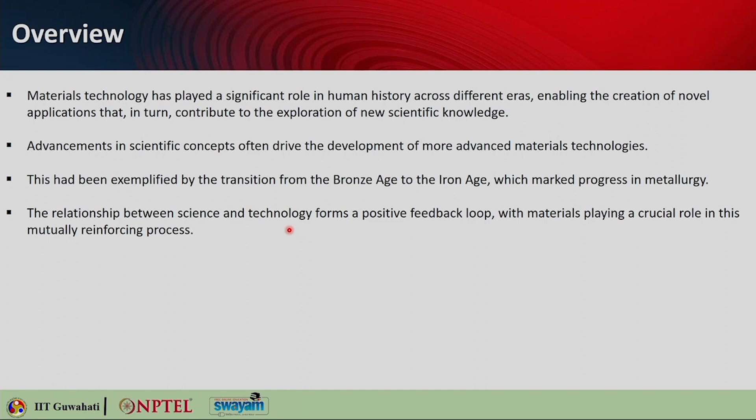Advancement in scientific concepts often drives the development of more advanced material technologies. This has been exemplified by the transition from Bronze Age to Iron Age, marking progress in metallurgy. The relationship between science and technology forms a positive feedback loop, with materials playing a critical role in this mutually reinforcing process.

Two significant examples from the past century are semiconductor technologies and optical communication, both of which have had a transformative impact on our ability to handle information. It is the blessings from semiconductor technology that allow us to compute very fast, and optical communication that allows transfer of data at lightning speed. These two have actually impacted a lot.

In recent decades, processing speeds for handling information have experienced exponential growth, primarily driven by the scaling of semiconductor electronic components. This trend was predicted by Moore's law - that the number of transistors in a chip will double every 1.5 to 2 years. This advancement in semiconductor technology and optical communication has revolutionized how we process and transfer information in this modern digital age.

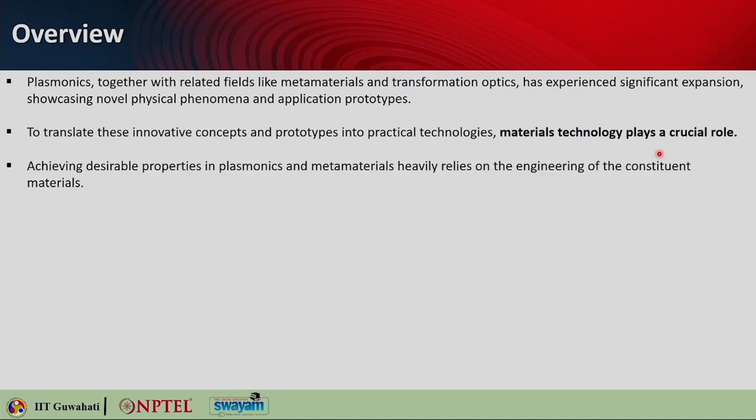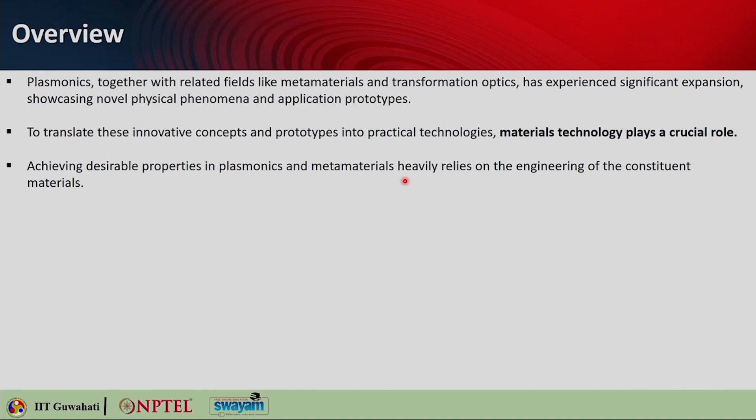Now, to translate these innovative concepts and prototypes into practical technologies, this is where material technology plays a crucial role. To achieve desired properties in plasmonics and metamaterials, they actually rely heavily on the engineering of the constituent materials. So that brings in the importance of material science in these domains.

Now, plasmonics has gained significant recent attention, though the first demonstrations of plasmonic effects were age old. If you remember the Lycurgus Cup or the stained glasses seen in medieval cathedrals - those were the first instances where plasmonic effect could be seen.

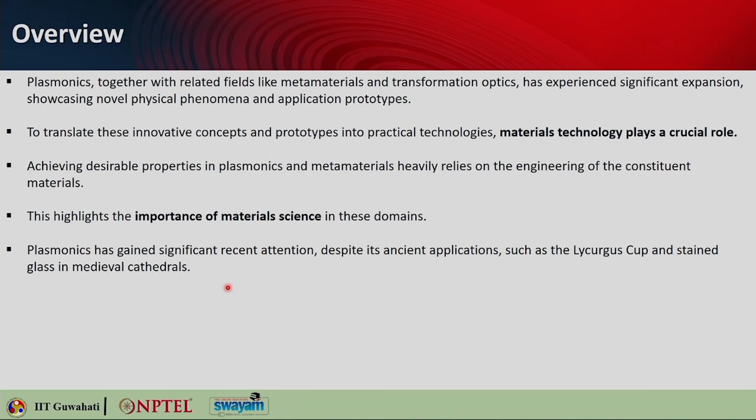Still, people are exploring plasmonics in this new digital era, because that can actually help in overcoming the limitations of both semiconductor electronics as well as dielectric photonics, and can give you the best of both worlds.

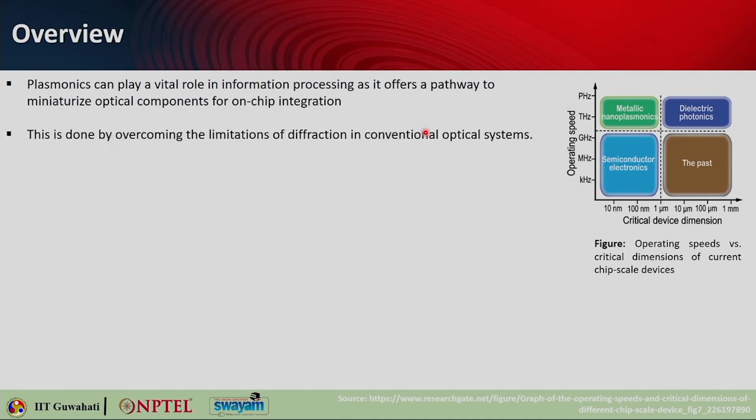You can get the critical dimension of the device almost below 10 nanometers, and you can still target operating speed above 1 terahertz. This can be done by breaking the limitation of diffraction of the conventional optical system. That is the challenge dielectric photonics faces.

Optical communication, being the fastest means of information processing, has this problem of miniaturization, and this is where plasmonics can help. Plasmonics can get you the size below the diffraction limit. We have seen this already.

This is an example of how you can excite surface plasmon polariton propagating along a metal dielectric interface when light is falling. But one thing not shown here is that it cannot be directly excited by simply shining light on the interface. You have to have an arrangement of phase matching, either using a prism or a grating.

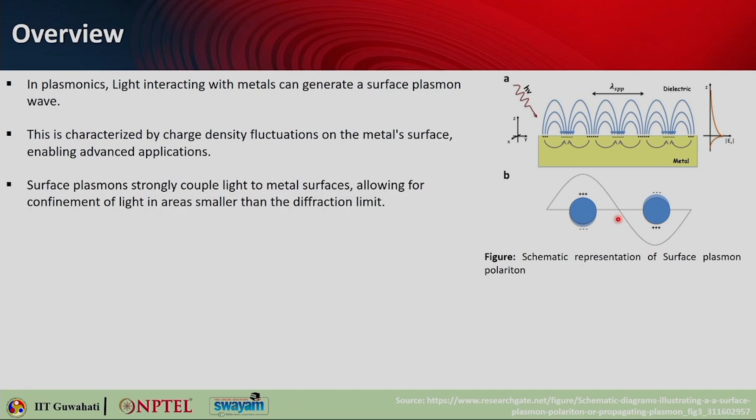We have seen this, and this is the example of localized surface plasmons which can work without anything—you can simply shine light on it and excite localized surface plasmons. They allow amplification of local electromagnetic field intensity by several orders, and they have found applications in sensing, scattering, absorption, enhanced absorption, or enhanced scattering phenomena.

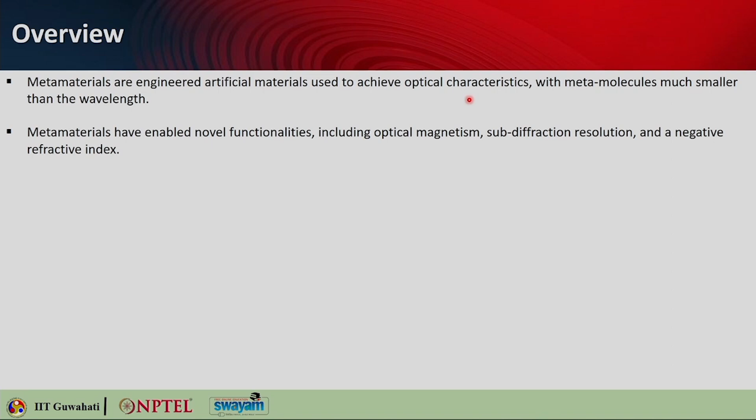We have also seen that metamaterials are basically engineered artificial materials that can give new optical properties, and the meta-atoms or meta-molecules are designed to be much sub-wavelength, smaller than the wavelength of light. Metamaterials have enabled novel functionalities such as optical magnetism, sub-diffraction resolution, or negative refractive index, and all these are possible by the materials themselves.

If you take metals, they exhibit negative real permittivity at optical frequencies, whereas dielectrics have positive permittivity at optical frequencies. Metals introduce optical loss due to their electronic transitions, creating a problem at optical frequencies because that limits device performance. If there is loss, the device heats up and you lose energy since it is simply getting absorbed. This presents a challenge in the design and integration of plasmonic and metamaterial devices.

If you use conventional metals, you face issues because of this high loss at optical frequencies. Now let us discuss these limitations of conventional plasmonic materials in more detail.

When you think about plasmonic materials, gold and silver should come to mind immediately. They are the popular choice for plasmonic and optical metamaterial devices due to their low ohmic loss and high DC conductivity. However, at optical frequencies, these metals exhibit interband transitions which introduce significant losses.

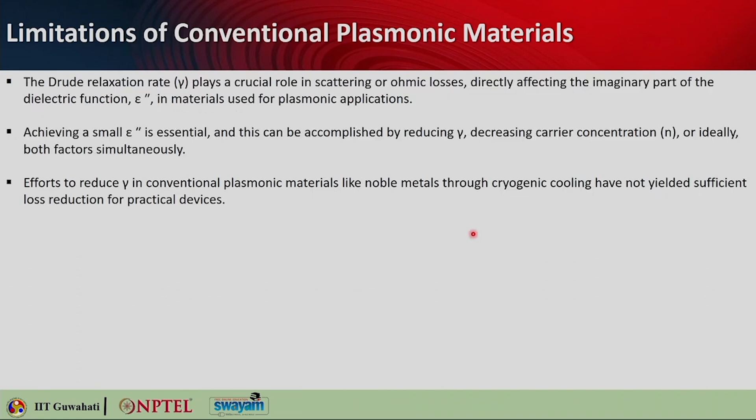Now, the efforts to reduce gamma, the relaxation rate, in conventional plasmonic materials like the noble metals, gold or silver, can be achieved through cryogenic cooling, but that has not yielded a sufficient amount of loss reduction for practical devices. So that did not work out.

So once again, what is the method of making this imaginary part small? You can reduce gamma or decrease the carrier concentration. These are the two methods: either you decrease this, or both simultaneously.

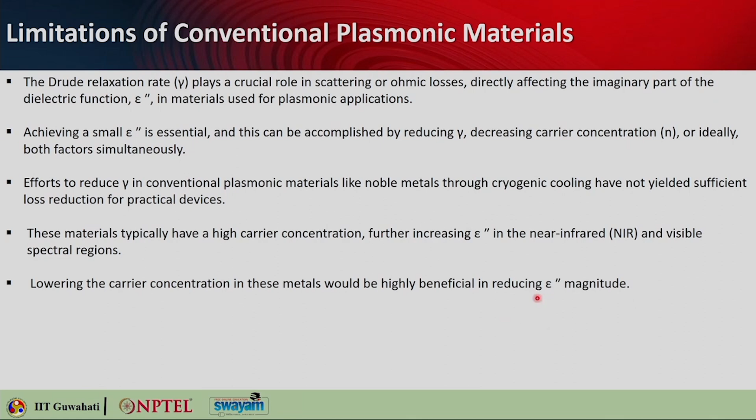Here what has been seen is that for noble metals or materials, they have very high carrier concentration, and this further increases epsilon double prime in the NIR and visible range. So lowering the concentration in this metal would be very beneficial for reducing the epsilon double prime magnitude. So what we are planning is to actually reduce the carrier concentration in the metal, which should give you a lower imaginary part of the permittivity.

Now, because conventional plasmonic materials like gold and silver suffer from high loss, they have significant issues in applications in plasmonics, optical metamaterials and transformation optics. It's understood, because if you design a waveguide using this kind of plasmonic material, because of the loss, the propagation length will be very short, so that will not help you.

Although you are able to confine energy in a very tiny space, you will not be able to take that energy further because of this kind of intrinsic material loss. And another challenge will arise from the real part having a large magnitude in transformation optic devices. So in transformation optic devices, for metal dielectric combinations, you should not have very large singular values.

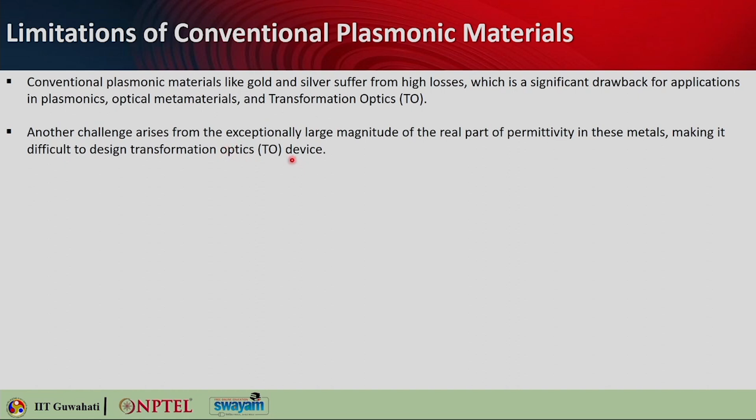If you make epsilon double prime very small, another challenge comes from the exceptionally large magnitude of the real part of the permittivity. In materials like gold and silver, the real part of permittivity is very high, which makes it difficult to realize a transformation optics device.

On the other hand, if the metal's real part is significantly larger than that of the dielectric, it requires using very small metal inclusions within the metamaterials, or metamolecules in a metamaterial design, and such small metal inclusions make it very difficult for nanofabrication, creating fabrication challenges.

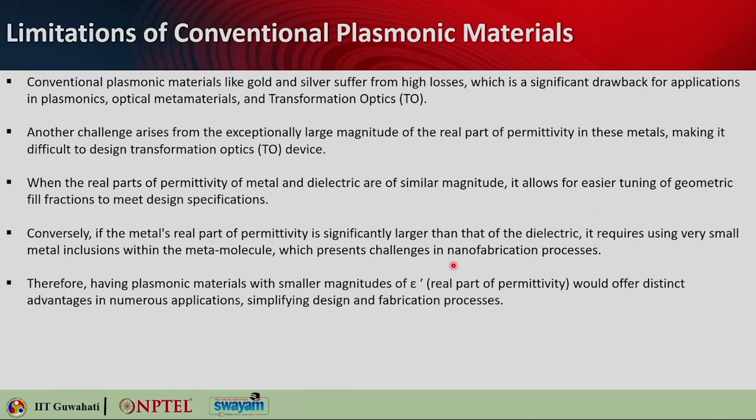Therefore, having plasmonic materials with smaller magnitude of epsilon prime, the real part of permittivity, would offer distinct advantages in numerous applications while simplifying the design of the structure and simplifying the fabrication processes.

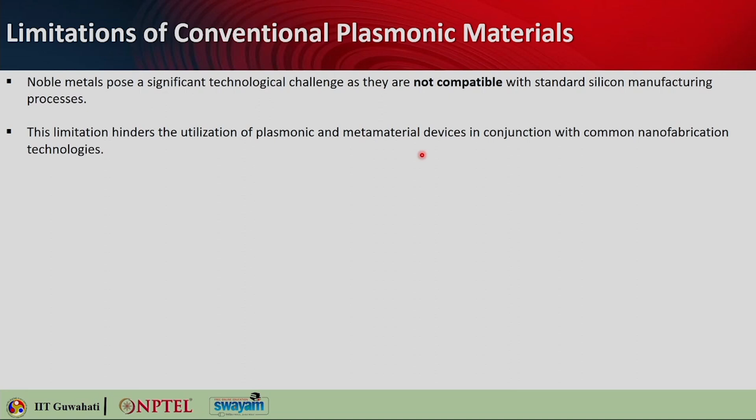So we understood that noble metals pose a significant technical challenge and are not compatible with standard silicon manufacturing processes. These limitations hinder the utilization of plasmonic and metamaterial devices with common nanofabrication technologies. Also, the incompatibility limits potential integration of plasmonic and metamaterial components with nanoelectronic devices, restricting the development of advanced hybrid technologies.

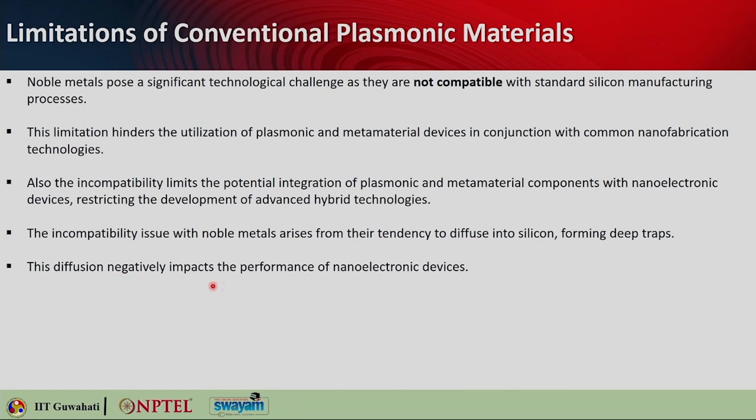So the issue is with the material that shows these plasmonic properties. The incompatibility issue with noble metals arises from their tendency to diffuse into silicon, forming deep traps, and this diffusion negatively impacts the performance of nanoelectronic devices. That is a problem.

Integrating noble metals into silicon manufacturing processes becomes a very complex task due to this diffusion issue, making it very difficult to achieve without specialized processing steps. So you have to incorporate extra care into the fabrication process to handle this.

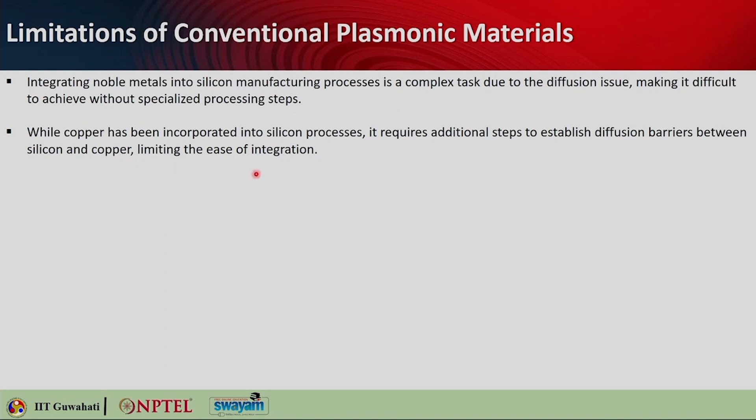While copper has been incorporated into silicon processes, it still requires additional steps to establish diffusion barriers between silicon and copper, which limits the ease of integration. Despite these advancements, gold and silver still remain impractical for integration into silicon manufacturing processes, due to the challenges associated with noble metals in these technologies.

With all these shortcomings of conventional plasmonic materials, researchers have been motivated to search for better alternatives. Many alternatives to metal have been proposed that can overcome one or more of the drawbacks mentioned till now. The significance of choosing an alternative plasmonic material depends on the end application.

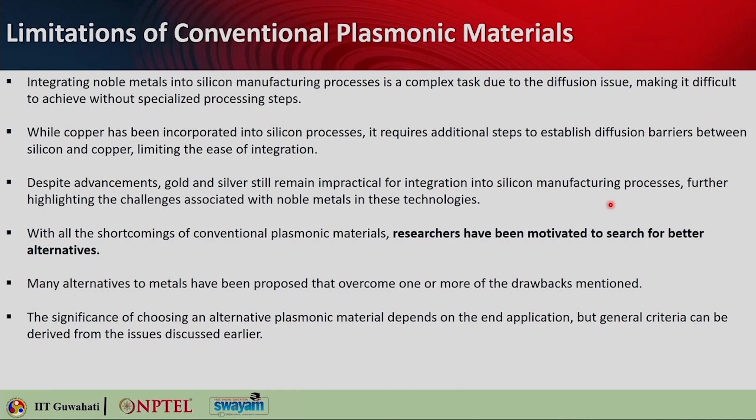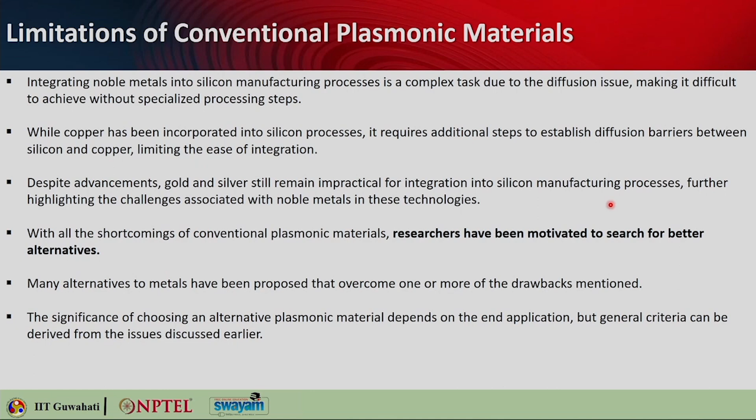This is very important - you need to know what application you are looking for. There is no one-size-fits-all solution. Depending on the application, you can choose the right alternative material, and we will discuss the general criteria on how to choose materials in this lecture.

We have been looking for an alternative to metals in a lossless metal, which is bit elusive and difficult to find, but that is an ideal candidate that can replace metals in plasmonic and metamaterial devices. We are looking for purely real and negative permittivity, where epsilon double prime, the imaginary part, is 0, and the real part is negative. This is the best kind of metal you can think of, giving a metallic response but no loss.

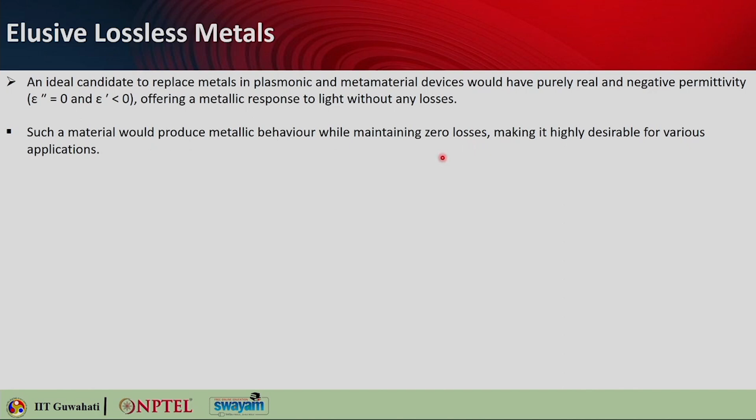Although such a material would be highly desirable for various applications, achieving zero loss and negative permittivity simultaneously for all frequencies in any dispersive material is impossible due to the causality condition, and that basically limits the feasibility of such an ideal material.

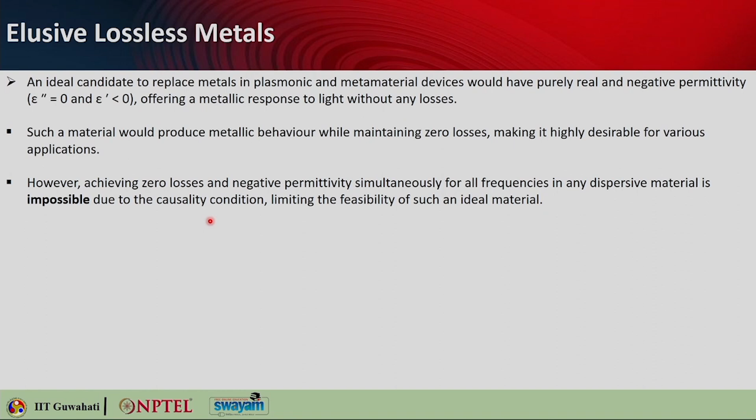So, the real and the imaginary part of the permittivity are related by the Kramers-Kronig relationship, which we are not discussing here in detail, but I just wanted to tell you that this relation tells you that these two components are tied together. So, if one is made too small, the other one will become very large, okay, like that.

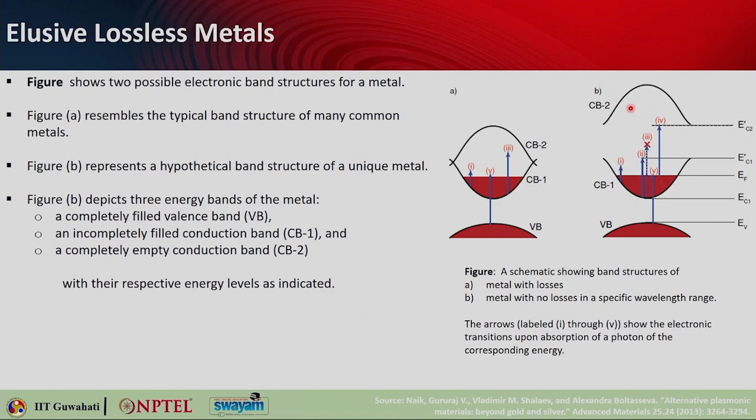So, here in this particular figure you are able to see three things. First, you can see a completely filled valence band, then you can see an incompletely filled conduction band 1, and then you can also see a completely empty conduction band 2.

So, what happens when photons with energy less than EC1 prime minus EC1, this gap, that can cause intraband transitions, labeled as 1, in CB1, leading to significant optical loss, which is very similar to the Drude metals at low frequencies.

Now, if you see that when the photon energy slightly exceeds EC1 prime minus EC1, if the photon energy is slightly larger than this, they will end up going here, and this is not allowed. So, that is the case where you do not have any transition, and this situation is very unique, and this does not happen here, because here within the conduction band there are empty levels, but here because you have this gap, these are not allowed levels.

So, the lossless regime actually persists as long as the photon energy is less than the lower of EC2 prime minus EF, this gap, and EF minus EV. So, as long as the photon energy is less than the minimum of these two, you will end up having this kind of transition which is not allowed.

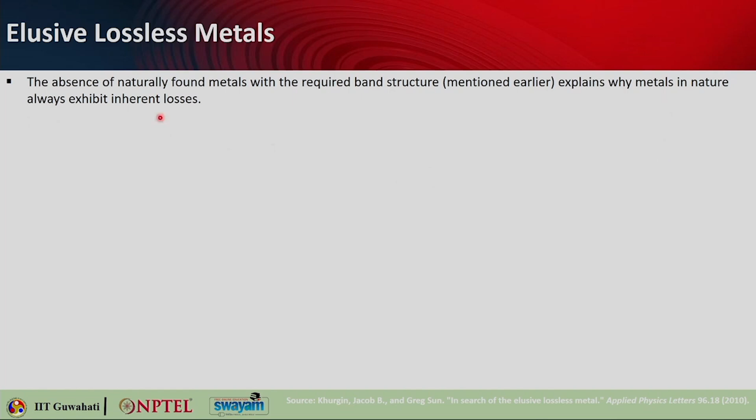So, Khurgin and Sun proposed in this particular paper the stretching of the lattice of sodium metal by nearly a factor of 2 could achieve metallic behavior, that is real part of permittivity to be negative and lossless in a particular spectrum, that is in mid IR, 1.8 micron to 2.4 micron. Although the practicability of this concept remains uncertain. So, they have proposed it, but then they could not show it. The paper also suggests techniques to stretch metal lattices by including foreign atoms.

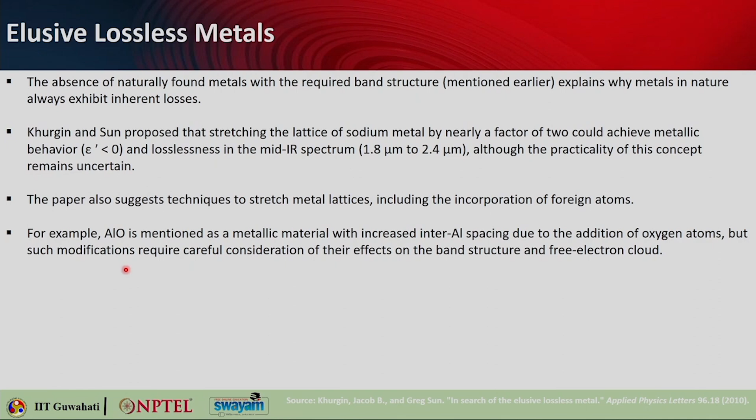For example, aluminum oxide is mentioned as a metallic material with increased inter-aluminum spacing due to the inclusion of oxygen atoms, but such modifications will require careful consideration of their effects on the band structure and free electron cloud. The addition of foreign atoms can alter the electronic band structure and conduction band electron distribution. In aluminum oxide, oxygen nuclei bonding with aluminum electrons reduce the concentration of free electrons in aluminum.

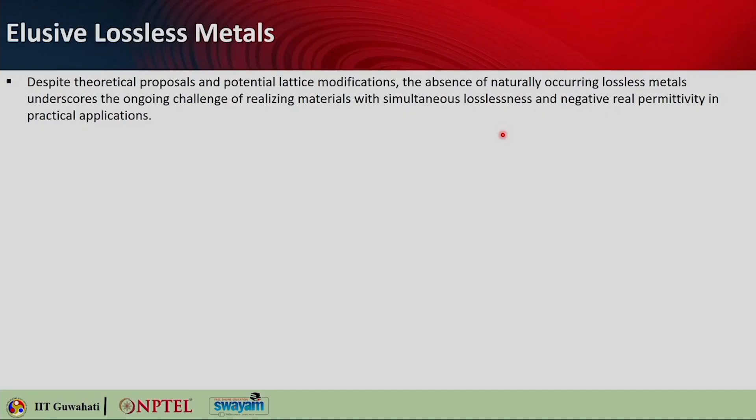Now, despite theoretical proposals and potential lattice modifications, the absence of naturally occurring lossless metals underscores the ongoing challenge of realizing materials with simultaneous losslessness and negative real permittivity in practical applications.

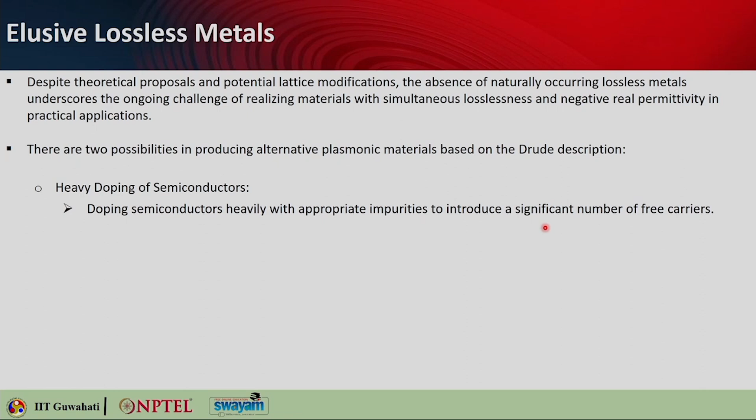So there are two possibilities in producing alternative materials based on the Drude description. One, you can think of heavy doping of semiconductors, so you are basically doping a semiconductor such that it starts behaving like a metal. This introduces a significant number of free carriers, and this process can shift the optical properties of the semiconductor towards metallic behavior within a desired wavelength range, enabling plasmonic applications.

And the other approach is carrier reduction in metal. You have to reduce the excess free carriers in metallic materials through various techniques, and by controlling and reducing the carrier concentration, it becomes possible to tailor the plasmonic properties of metals for specific applications over a desired wavelength range.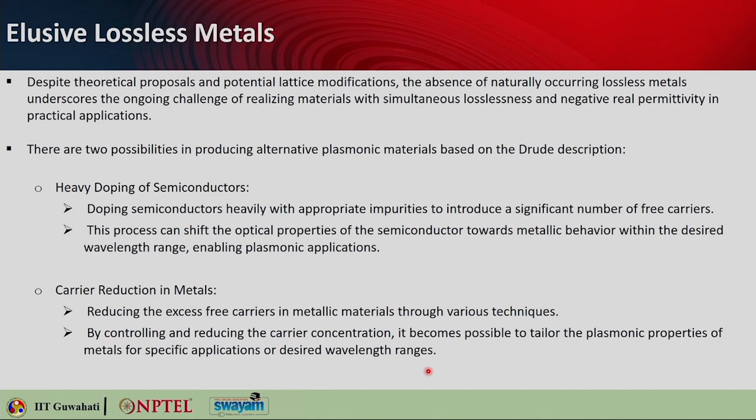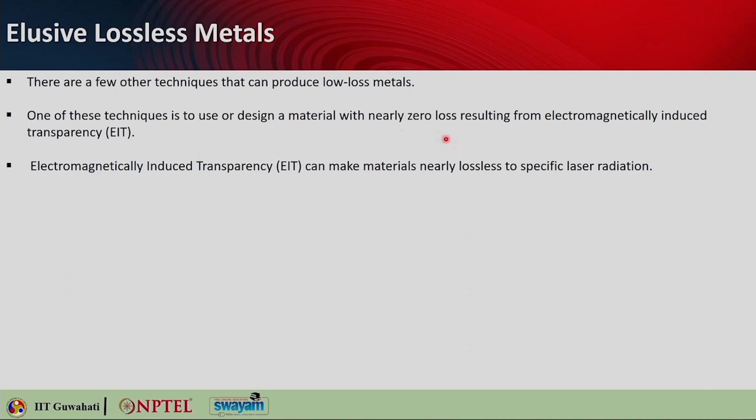So there are a few other techniques that can produce low loss metal. One of these techniques is to design a material with nearly zero loss that results from electromagnetically induced transparency, EIT. EIT effect can make materials nearly lossless to specific laser radiation. There, the transmission suddenly improves because of a resonance effect.

EIT relies on a nonlinear optical phenomenon where one resonance frequency reduces losses when a strong field is applied at another resonance. We will not go into the details of the EIT effect, but you can always look for electromagnetically induced transparency effect in materials, and there you can see that it actually becomes lossless at a particular laser radiation. This is a narrowband effect.

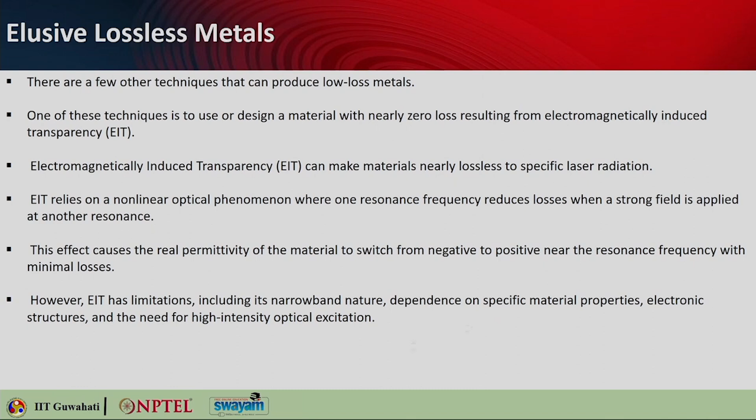This effect causes the real permittivity of the material to switch from negative to positive near the resonance frequency with minimal loss. However, EIT has limitations: they are inherently narrowband in nature, depend on specific material properties and electronic structures, and also require high intensity optical excitation.

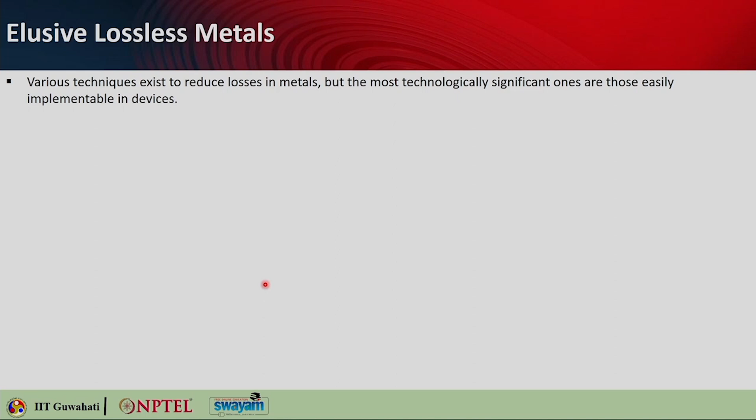Various other techniques also exist to reduce losses in metals, but most technically significant ones are those implementable in devices. Another approach would be to alter the plasma frequency of the Drude metals, and that could be a promising and accessible approach without major technical barriers or challenges.

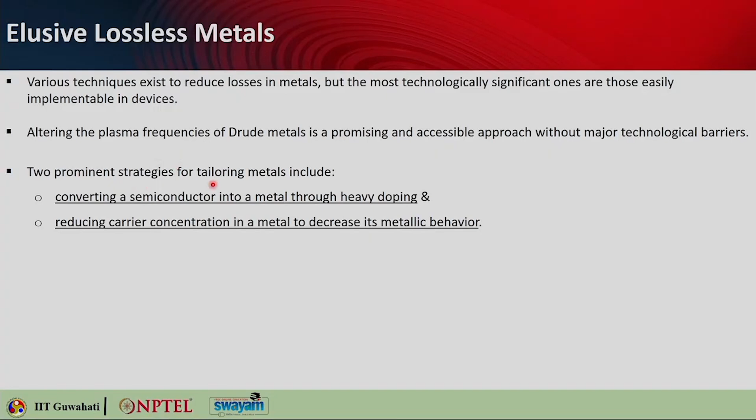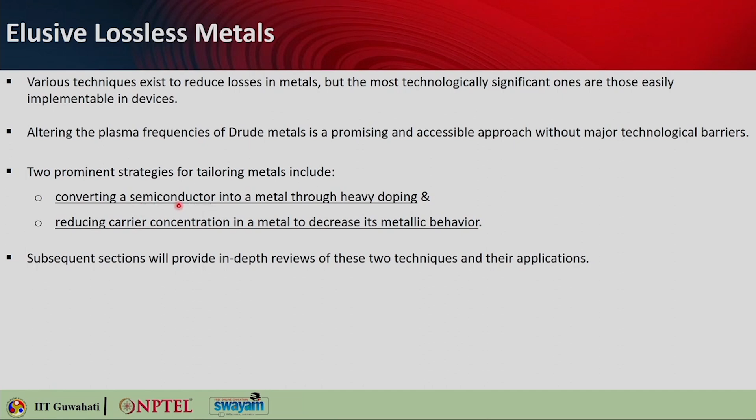So how can you do that? Two prominent strategies of tailoring metals are: one, you can convert a semiconductor into a metal through heavy doping, and the second one is to reduce the carrier concentration in metal to decrease this metallic behavior. We have actually discussed briefly these two methods, and we will now look into each of these ideas in a bit more detail and see what their applications are.

So let us begin with semiconductor to metal. We understand that heavy doping of semiconductors can be a method of increasing the carrier concentration and making semiconductors behave like metals, but they are also actually less metallic metals. To achieve metal-like optical properties, you require the real part of the permittivity to be negative in a specific spectral range.

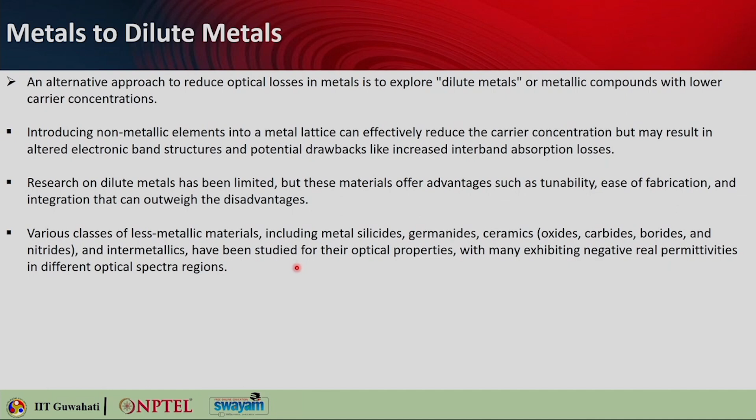So various classes of less metallic materials such as metal silicides, germanides, ceramics like oxides, carbides, borides, nitrides and intermetallics have also been studied for their optical properties, and many of them have exhibited negative real permittivities in different optical spectral regimes. Specific focus is given to materials like silicides, germanides and metal nitrides, because they have relevance also in silicon CMOS technology.

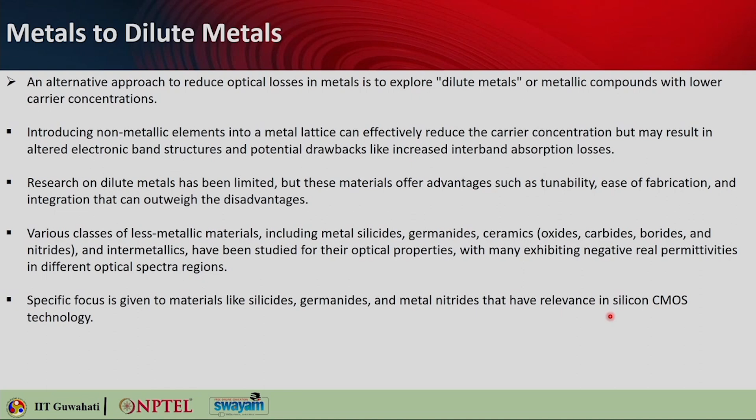So let us look further into silicides and germanides. These are compounds of metals with silicon and germanium. They can exhibit metallic properties across the mid infrared and near infrared ranges, so that is a pretty wide range.

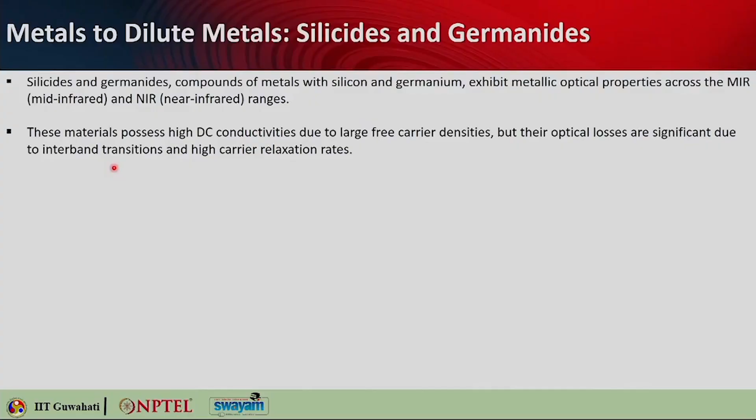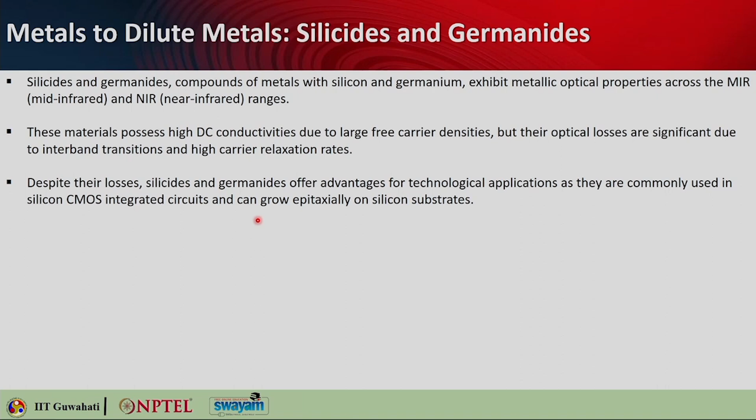These materials possess high DC conductivities due to large free carrier densities, but their optical losses are significant due to interband transitions and high carrier relaxation rates. Despite these losses, silicides and germanides can offer advantages for technological applications, as they are commonly used in silicon CMOS integrated ICs, and they can grow epitaxially on silicon substrates.

That way, fabrication wise, it is much easier. Various deposition techniques such as co-deposition, chemical vapor deposition, and physical vapor deposition will be looked into in the next lectures. They can be applied for fabrication of silicides and germanides. Etching techniques, both wet and dry, can be used for patterning and lift-off processes, with hard masks like silicon oxide or nitride common in their fabrication. We will cover briefly all these different methods of nanofabrication in the next two lectures.

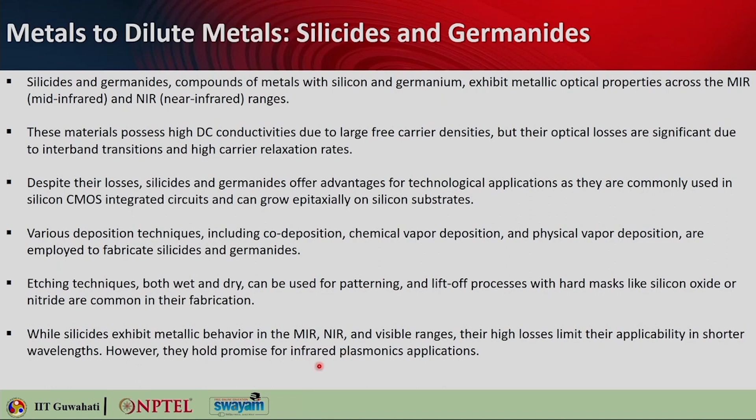While silicides exhibit metallic behavior in the mid infrared, NIR, and visible ranges, their high loss limits their applicability at shorter wavelengths. However, for infrared plasmonics they have good potential.

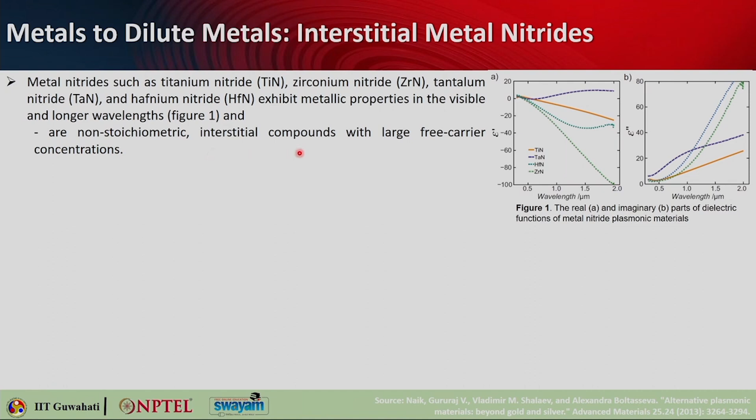Next will be the metal nitrides. You can think of different metal nitrides like titanium nitride, zirconium nitride, tantalum nitride, and hafnium nitride. They also exhibit metallic properties in the visible and longer wavelengths, as you can see here. This kind of nitride is non-stoichiometric, and they are interstitial compounds with large free carrier concentrations.

Here you can see different optical images of thin films of metal nitrides deposited on glass substrate, basically deposited by DC reactive sputtering. The thickness of the films is in the range of 100 to 120 nanometers, and you can see metallic luster from the films, showing the possibility of plasmonic behavior in the visible spectrum. The color of the films correlates with the plasma frequency or the carrier concentration in these films.

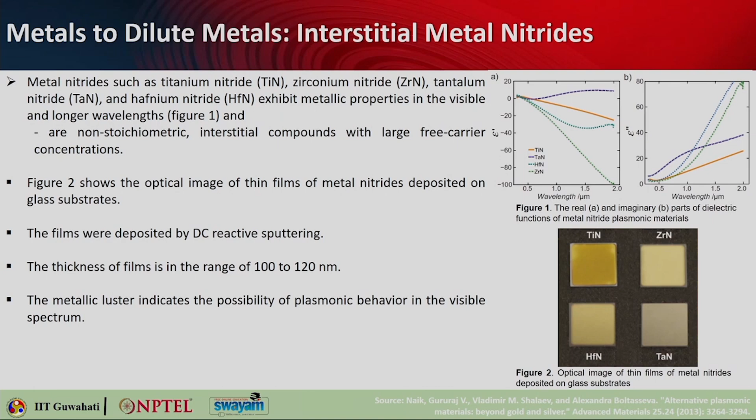With that, we understood the different methods of creating alternative materials beneficial for plasmonic applications in different frequency ranges. We can also look at different 2D plasmonic materials, also referred to as flatland plasmonics, which gained substantial attention after the demonstration of plasmons in graphene. Two-dimensional materials like graphene offer advantages over bulk 3D materials, and that is why a lot of scientific research and applications have been demonstrated using graphene.

The 2D material properties, the optical properties, significantly differ from 3D materials, leading to distinct plasmon dispersion relations. These 2D materials are valuable in different applications including electronics, and they offer the advantage of dynamic tuning of their properties through methods like electrical, chemical, or electrochemical means. That is something really groundbreaking—if you can dynamically tune the properties of a device after fabrication, that makes it a very cool thing.

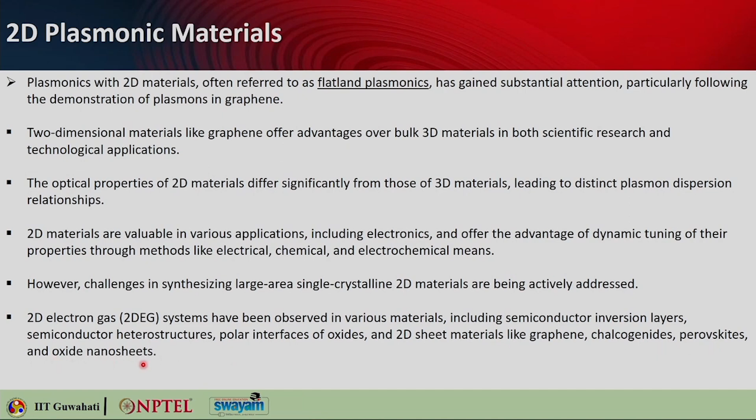Plasmons have been experimentally observed in these 2D electron gas systems such as semiconductor inversion layers, semiconductor heterostructures, and graphene. However, in most cases these observations are limited to low temperature conditions due to high losses, and here the high loss is because of the low carrier mobility or high carrier scattering rate at room temperature.

If you think of plasmons in 2D electron gas systems, they are primarily observed in the mid infrared or longer wavelength range. So plasmons in the visible and NIR are not observed using these 2D plasmonic materials due to insufficient carrier densities.

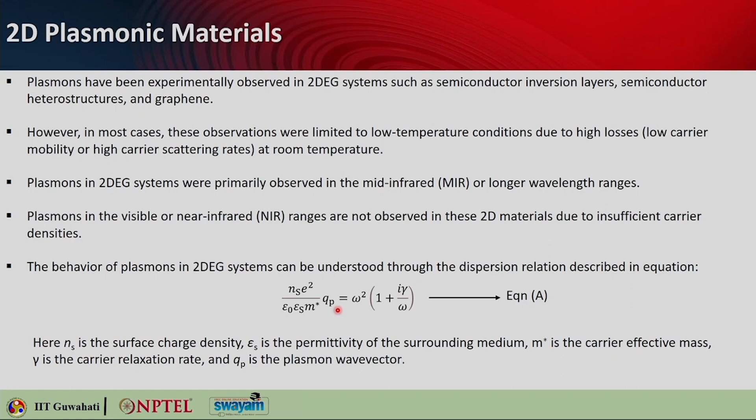In the case of graphene, the carriers behave as if they are massless, and hence the dispersion relation is different. This is the plasmon dispersion relation in graphene at low temperature.

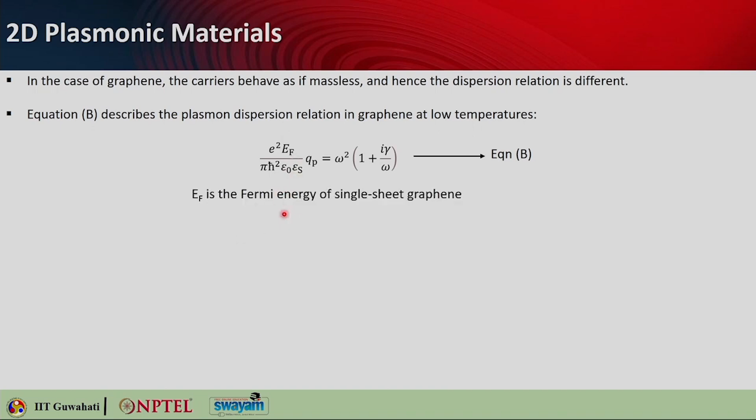Here EF stands for the Fermi energy of single sheet graphene. If you take equation A and B shown here, this allows us to quantitatively examine the characteristics of plasmon in 2D plasmonic materials. Plasmon can theoretically exist in 2D electron gas at all wavelengths, but practical limitations may prevent their excitation and observation when the plasmonic wavelength becomes too short.

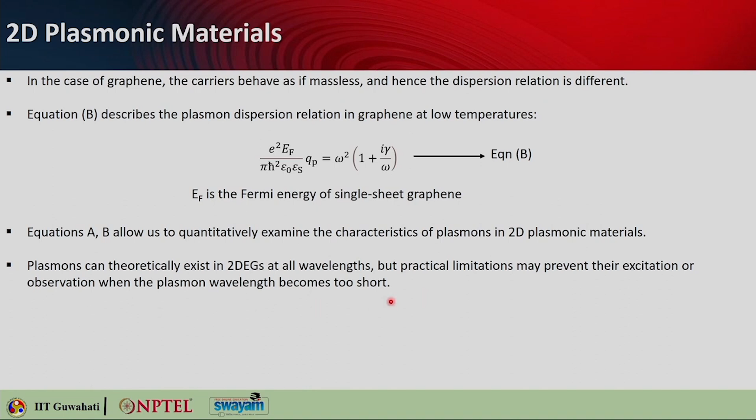Let us do a comparative study. Localized surface plasmon resonance, or LSPR, was seen initially only for gold and silver in the visible spectral range, and by 2010 alkali metals also showed these properties in visible and UV. Now with ITO, AZO and GZO included in the list, they can also show LSPR. This kind of nanostructure can show this in UV, visible and NIR. New materials are allowing people to explore the same plasmonic properties at different wavelength ranges, which was not explored before using conventional plasmonic materials.

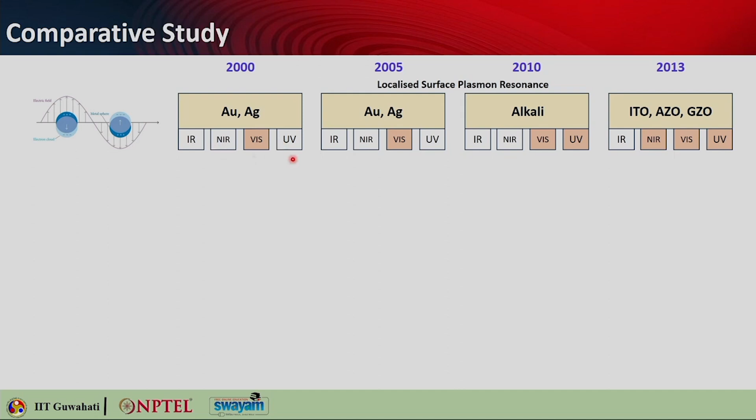Similarly, if you think of tunable materials, silicon gave tunability in NIR and visible, germanium and 3-5 semiconductors also in the same range. With graphene you can explore infrared, and with ITO, AZO and GZO also you can explore tunability in this range.

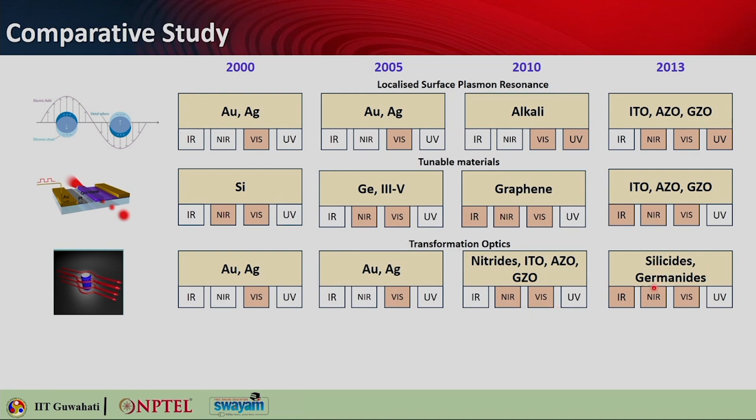For transformation optics, gold and silver if you use, you can only cater to the visible range, but with nitrides, ITO, AZO, GZO you can look after the NIR range, and with silicides and germanides you can also look for visible, NIR and MIR, mid-IR range.

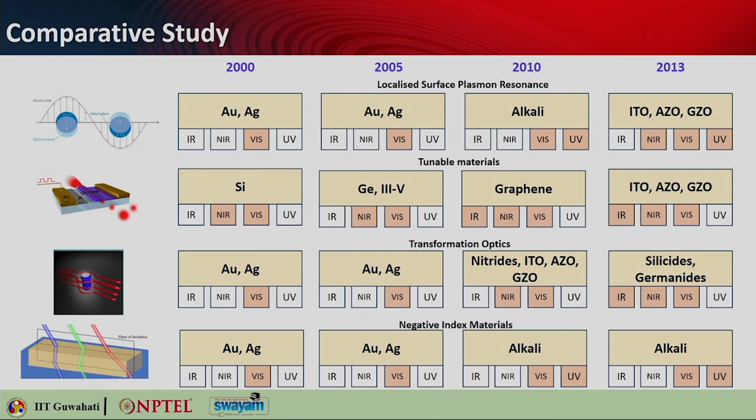For negative index metamaterials, you can see gold and silver again only in visible, with alkali you can get it in the UV, and that is how different materials gave you options to explore the similar kind of feature or phenomena in different wavelength ranges.

So let us conclude what we have discussed in this particular lecture. Plasmonic materials play a crucial role in nanophotonics and metamaterials because they enable manipulation of light at nanoscale. We have seen that noble metals like gold and silver are traditionally used in plasmonic applications due to their strong and tunable plasmonic resonance in the visible and near infrared range. However, these metals suffer from high optical losses that limit their applicability in certain devices at shorter wavelengths.

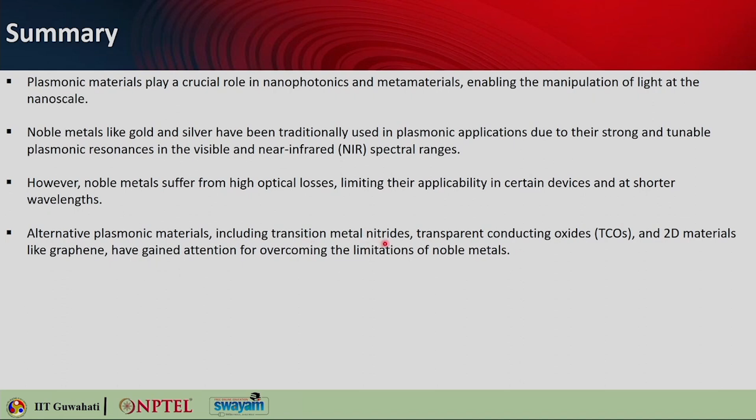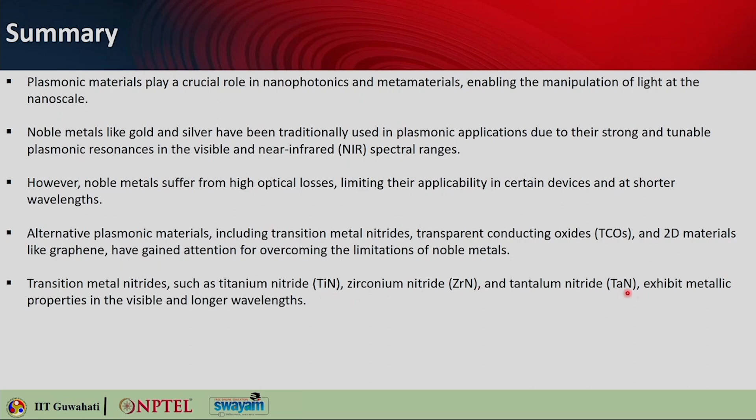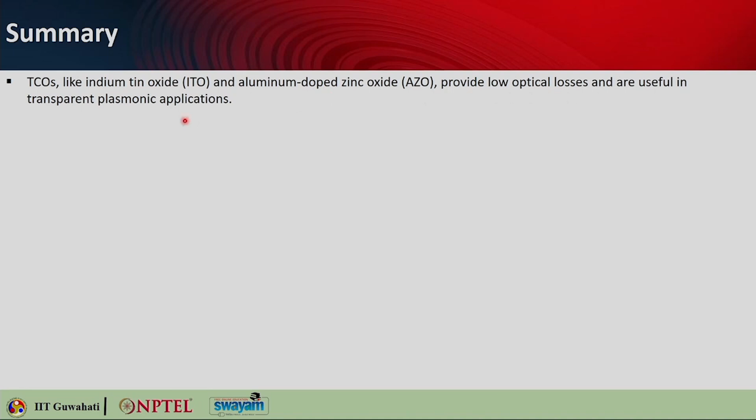So researchers have been looking for alternative plasmonic materials such as transition metal nitrides, transparent conducting oxides, and 2D materials like graphene. All these things are gaining more attention to overcome the limitations of noble metals. Transition metal nitrides like titanium nitride, zirconium nitride also exhibit metallic properties in visible and longer wavelengths. TCOs like ITO, AZO provide low optical losses and are good for transparent plasmonic applications. Graphene, a 2D material, also allows dynamic tunability of the plasmonic properties via electric field effect methods.

You can bias the graphene sheet and change its chemical potential, and that can give you a different optical property, and that is very cool. Plasmons in alternative materials can be harnessed for different applications such as sensors, waveguides, super lenses and negative index materials. Resonant and non-resonant plasmonic applications will differ in their reliance on localized surface plasmon resonance and material properties, while noble metals excel in resonant devices.

So while there is no single ideal material for all plasmonic and metamaterial applications, there is no one superhero kind of material, but you can keep looking for alternative plasmonic materials for a particular application and wavelength range, and they can offer you promising alternatives to noble metals like gold and silver.